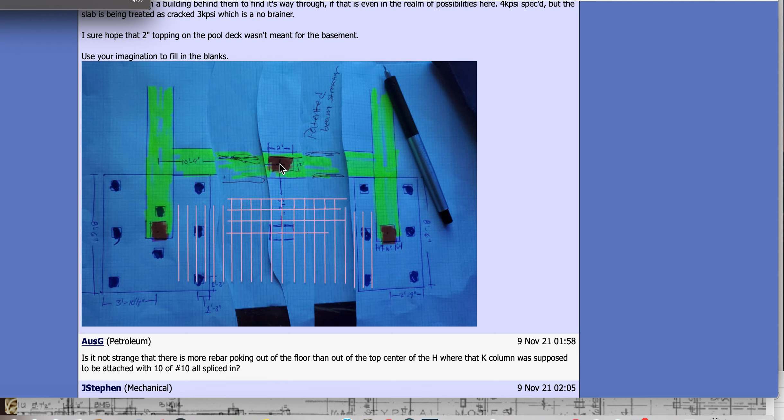Right here, it's out here. I'm like, you know what, you guys told me to do a fake video like I did my trash can, my vacuum bucket thing. Well I did a video some time back, but Jamie, I don't know where Jamie is anymore, busted me on it like right then. As soon as I tried to do my fake vacuum bucket deal, I said here's a column right here, it's in the floor there.

And Jamie, before, it was like instant as the video was playing, because remember we look at him in replay, Jamie wrote in the feed, there's no column right there, there's no column in the driveway right there. And I was like, oh man, busted.

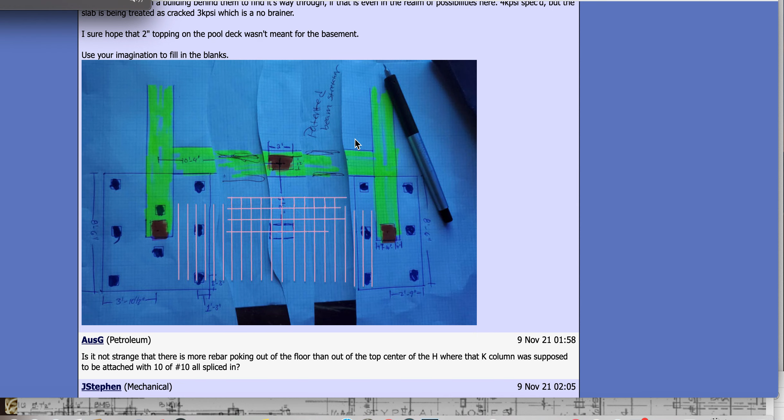Jamie didn't know that I was trying to do one of my fake videos and bait somebody in on it. And apparently Ostroff has found my fake video and is now posting it as 'look what I found, look what I found, look guys, it's a fake video.' Jamie busted me on it immediately. Everyone else should have busted me on it.

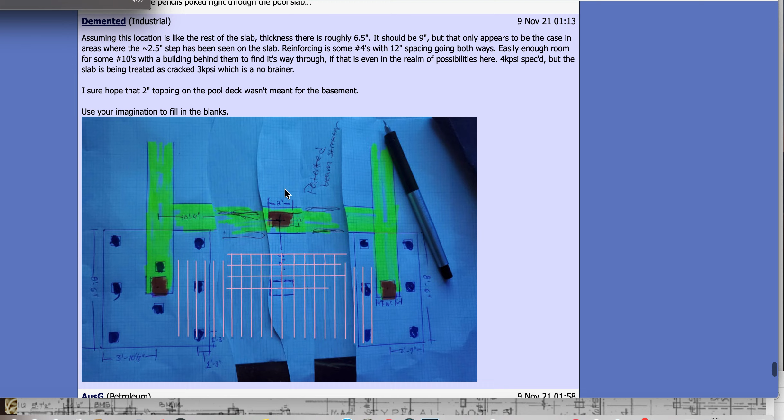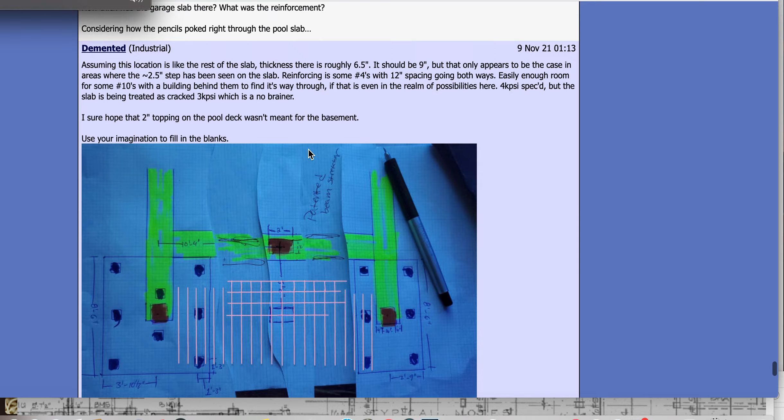Let's see what they say over here as of November 9th. It's a K column, but let's see what they say here. Let's go backwards, I kind of like reading backwards sometimes. I have not read all of this, so let's see. I'm not saying this is the next... okay, I got to go up more then. Obviously that's not going to work doing that. Whoa, double picture? Double picture, okay, that's confusing, let's just scroll up.

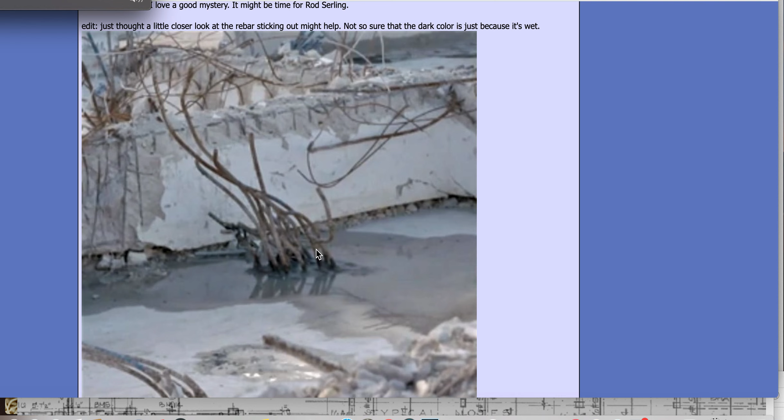Because he said it's over here chatting, and the engineer got over and said they're over here chatting. So right here is the quote mystery column, if you will. This is where Jamie busted me when I tried to discuss it.

Do I have your permission to use the phrase, you're doing pretty darn good compared to where I was? I was actually ready to say you found the column. I love a good mystery. It might, hold on, I got a cough.

Okay, here's the computer guy. This guy Charlie over here, he keeps thinking that I'm hiding my data. I'm not, there's a bunch of stirrups there.

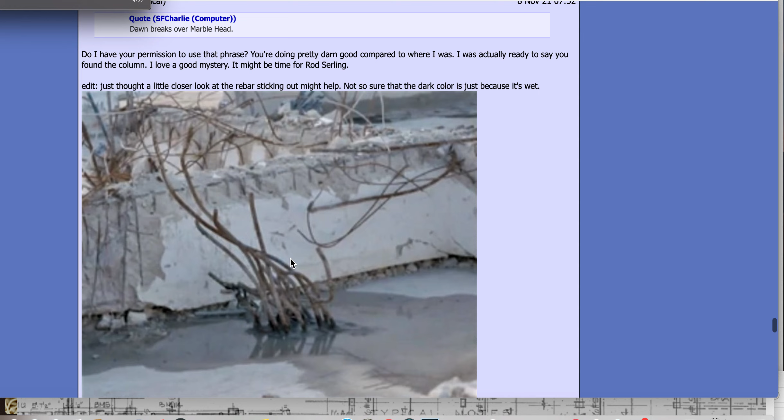This is implying that this column underneath here is what they're saying, it would be in the driveway. That's so funny, like I said, Jamie busted me like that. Look at the overlap, guys, the overlaps are nothing like the overlaps coming out of the floor anywhere else. There is no new concrete cut floor to put a pier down here, pilings etc. to hold the load of the structure. There is no cracked, deflected beam right here that would show why they'd even need it. So that's their belief, I understand.

What did Jeff say? Another interesting tidbit of information, I just brought up poring through the building permits. Several of the condo units in the 11 stack had the ACs replaced this year. We went over that stupid stuff forever.

I think a lot of you are misreading the plans, especially if you use the drawings Charlie uses. The line that you think is the bottom of the ramp on the drawing is not the bottom of the ramp. The drawings show the ramp in abbreviated mode, meaning it is not showing you the ramp continuing to the end. The bottom of the ramp really extends down to be on the north side of the H-beam. That ramp stops right where the ramp stops.

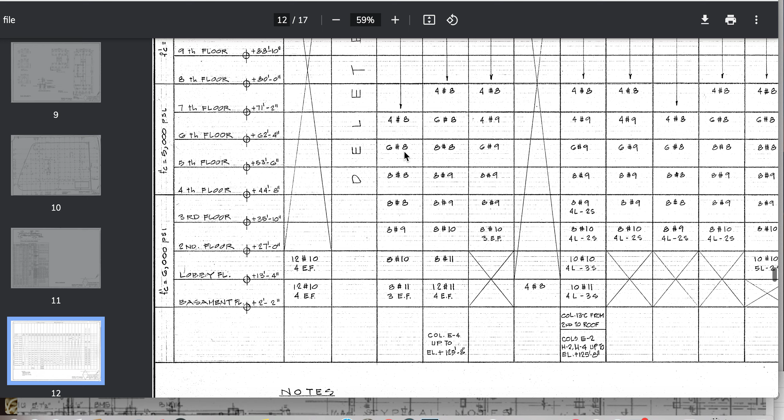Let's see if I do this right. All right, I don't want to give that away yet, I'm going to get to that. I already talked to the engineer, said I would do a quick 20-minute video, so I got to give him a video reply because we're writing back and forth. And I'm like, you know what, this is too much, let me just do a quick reply for you.

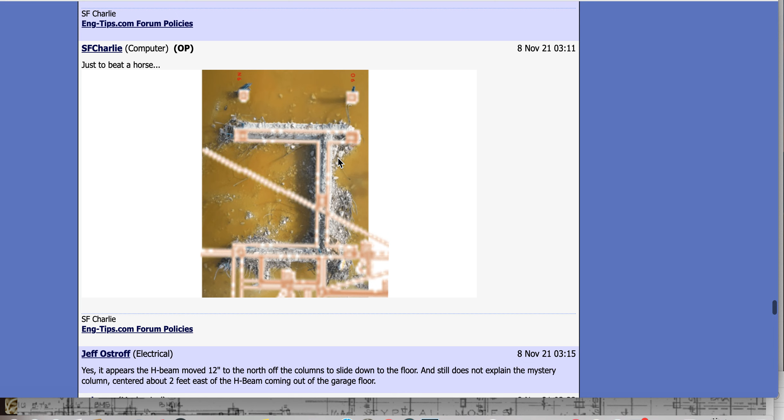Wow, he's talking to Charlie. Charlie's a, I don't care if he's talking to Charlie. Charlie's a computer guy, it doesn't mean anything.

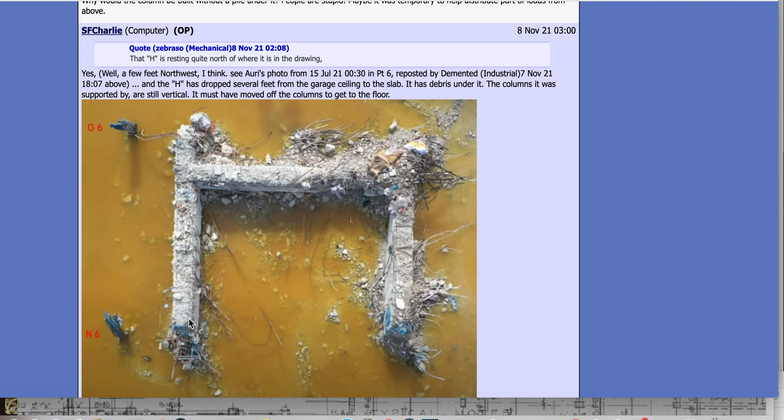Okay, so do you notice this plane? Does that look deviated to you, or does that look like a straight line? Deviation or straight line? Anyway, it's up to you to figure it out. This is slightly still higher. It's deviated. This is in tomorrow's video at noon, I don't really want to go over this now on that.

Newcomb says, why would you build a column without a pile under it? People are stupid. Maybe it was temporary to help distribute parts of the loads from above. Yeah, yeah. This is a good sound statement there. This is stupid to even consider that.

Jeff, where someone makes the claim that this column is falling 8 feet and impaling into the garage floor, you forgot that there is zero damage to the floor there. Zero damage is a big word.

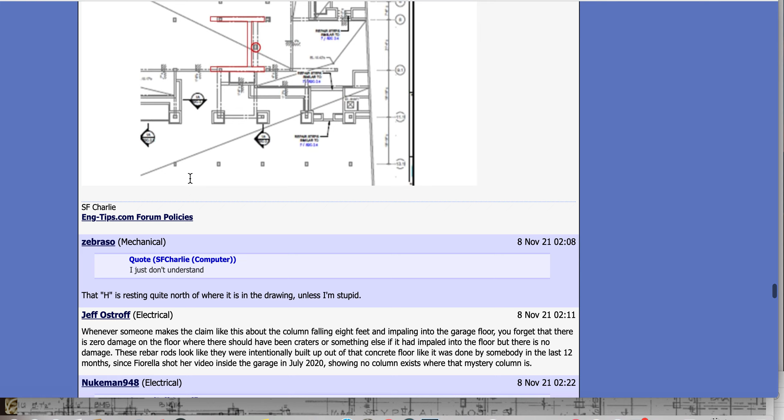Why am I doing this video? Really? All right, what the hell is this?

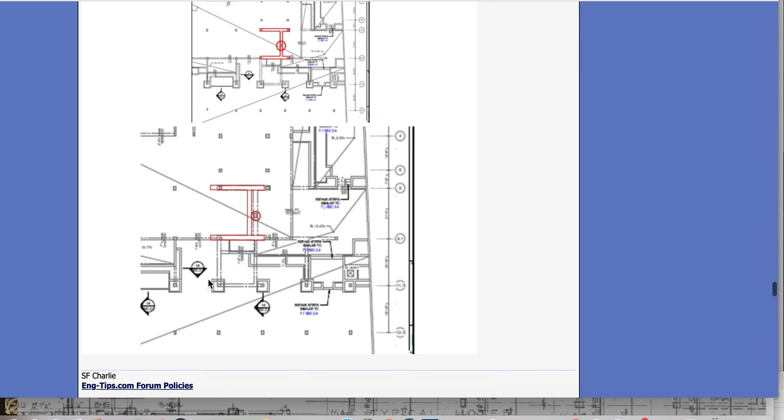Charlie writes on the drawing here, says, I must be stupid, but I just don't understand what the mystery is. Okay, Charlie says that. What is this, though, Charlie? Is he nailing it? Oh, no. The drawing, is it? I can't read it, it looks like he put more. Oh, these are the rooms above. What is this? Okay, not sure what Charlie's getting off on that one.

Newcomb: not to mention, no engineer anywhere in the world would put a column in the middle of a driveway only 4.5 feet from a perfectly good K column and transfer beams. Now, see, he said the K column, beams, but supporting nothing and only supporting a slab with no pilings. You know what, that's good enough. Newcomb is nailing it there. Who's he responding to? Reverse bias.

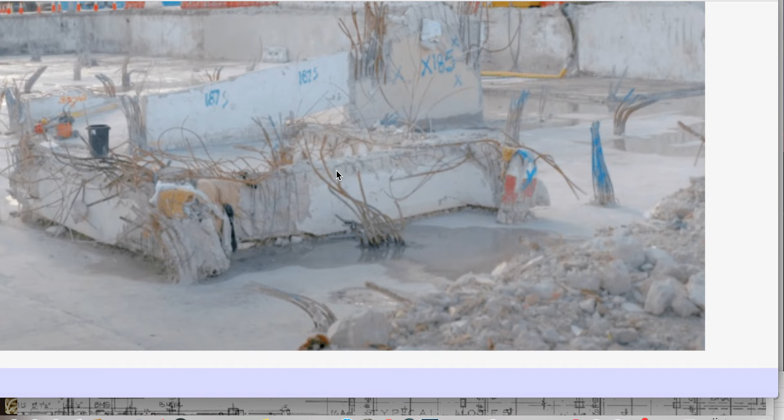Oh, here's a good picture. This is what the stub outs look like from columns. See how they come out of the ground stubbed out there? That's about the stub out height of all of them.

This one is way down here. These are way down here. This one's even taller, way up there.

So no matter what it may present as or look like, there were still parking on the other side of this. This is not some temporary column that they all of a sudden magically got the skill set to build an old rebar reinforced column within what? She filmed that two years ago and did that.

Now people are talking about it can't impale or whatever into this concrete. I have a video where I was trying to show you guys how to crack concrete with a sledgehammer, and I didn't publish it yet. I have so much video content I make for you guys. I punched through the concrete with a sledgehammer, and I was like, oh. So then at that point I said, well, that's what punching looks like. And it made a perfect punch through with the hammer.

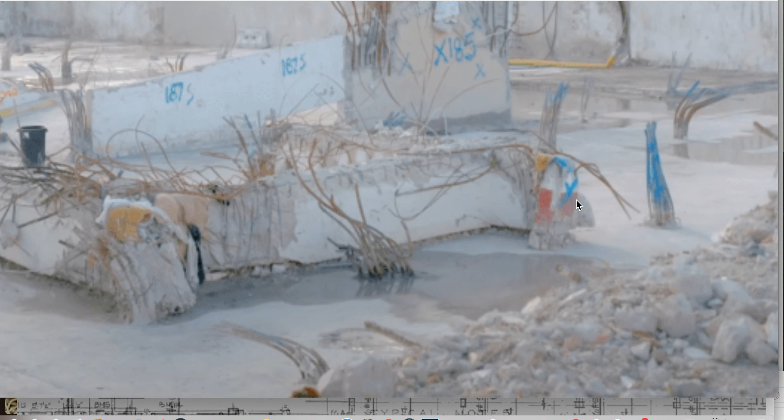And so this building driving down, it's odd. This one's the odd one where the head is missing. The forming of this is very interesting. This had a little more of a tail on it, I think, if I recall.

So this is this guy. See the tail, back end of it? So this tail seems like it just did a little shift, it did some shifting, and it drove down. It's where it is now, on the ground. Do you notice anything underneath of it? Any materials underneath of it?

Now this made it to the ground magically by itself. I showed it under the dog cam videos, which I'll talk about tomorrow at noon. The dog cam video shows this decking still to be in place around here, but it seems like they routed it out, if you will. They removed this decking that was on here, the slab, and they left this. Remember, they went at this like a bull in a china factory. So we don't know what really is going on here.

This is where I tried to get Jamie on, and Jamie stood his ground, said there's no column there. I was like, damn, Jamie got me.

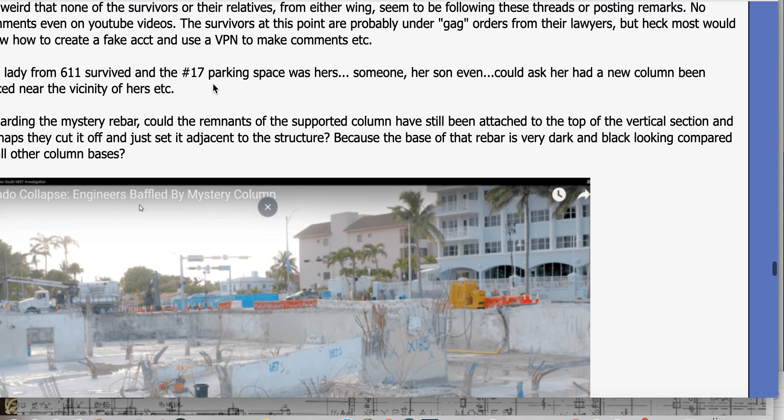Oh, engineers baffled by mystery column. This must be the one he's talking about, that the engineer told me about, that Ostroff wrote, that Ostroff did a video on. I did not look at it. No, I don't need to look at it. I set that up a long time ago. Jamie shut that down, and I hope to find it. Hopefully I've just said unblock all chats, so hopefully I can see it all in the chats.

Now let's jump right into the drawings. Let's slide back down to K. I'm going to do this kind of reverse and then reveal it, do the reveal that way. So let's slide down to columns.

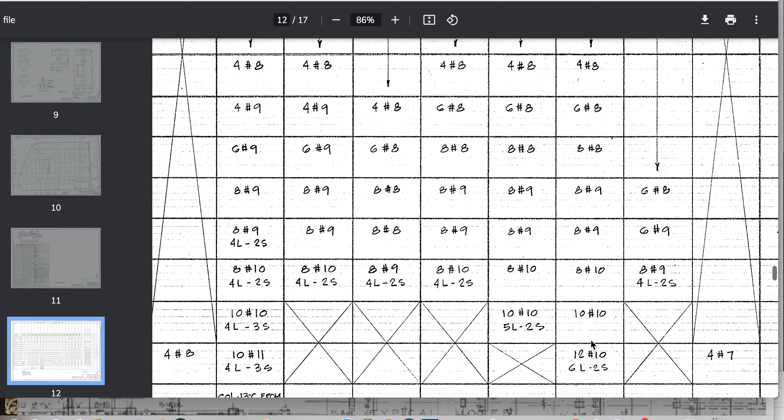Oh, so he's right, it was supposed to be a column on the floor there. Right on K, see the column right there? Right there, that's right on K. Look at that, he's right. Oh, that's L. Oh, wait a minute.

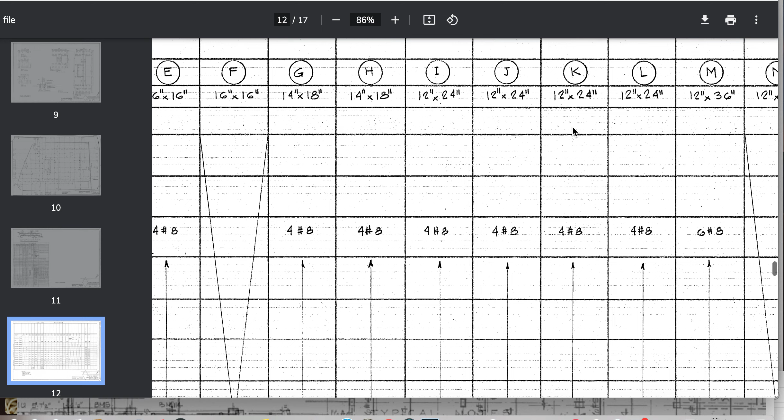Oh, here's K. So I slide down. And X there, slide over. X, basement, nothing. Slide over. It says lobby, lobby floor next. Slide over. Oh, isn't that amazing? Ten number 10s, all the way up to, oh it keeps going, all the way up to the roof line, up to the 12th floor. Isn't that amazing?

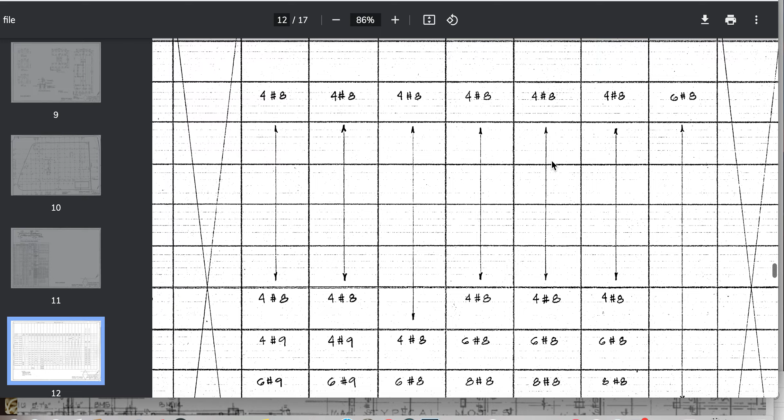So it appears there is a K column, and it appears the K column does not have anything underneath of it. Does not. Oh wait a minute, where's K? Where's K? Well hold on, hold on, where's K? Where's K? Where's K? Oh, where is K?

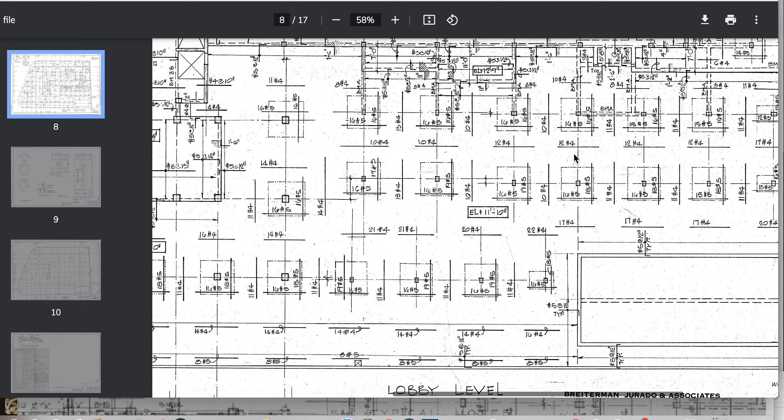Okay, so you guys got to stop watching that guy over there. Let him play around with selling his tools and lying about stickers on cars.

You remember? Here's K, there's your friggin' K column, all right? There it is, K column. There's an H, there's your H right here. Doom, doom, doom, doom, there's the H.

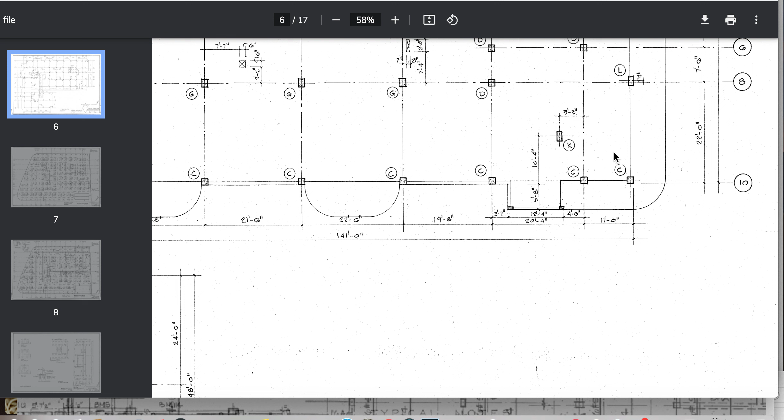I did an overlay video on this back in August. Really? Oh, this is part of content for tomorrow, I mean, yeah, tomorrow's video.

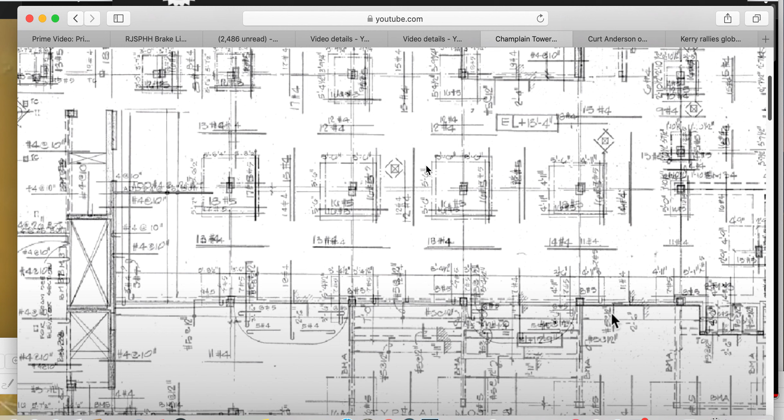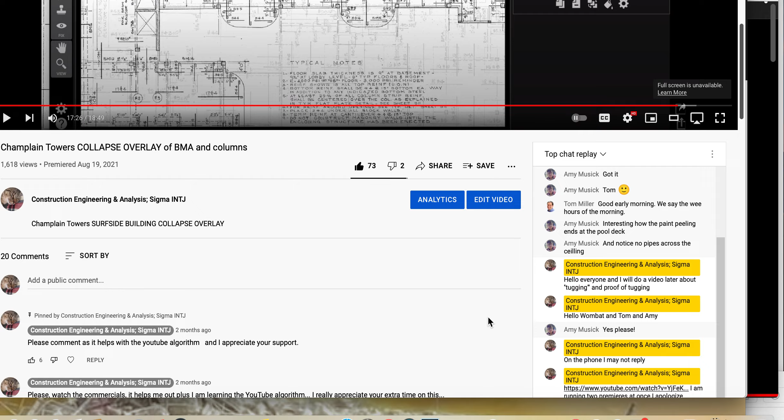Oh, this is my video. August 19th, I did an overlay, and I show that the overlay is here. I show the overlay is there. I was trying to find the one with Jamie, or I wonder if I even deleted Jamie's comment so it could still stay as a troll comment.

Jamie, I hope you're here, man, and you remember that you busted me on it instantly. I hope you're still around, and you can come out and say on this video, yeah, I said that. I remember you did that. And I remember I said no, and I said, well, Jamie, it's present, it's there. I was having a little fun, sort of like my video I set everybody up on, because you guys told me I should use some fake videos, set people up. This was one of the best ones I thought to set them up with the data of that column in the ground there. That would be so awesome.

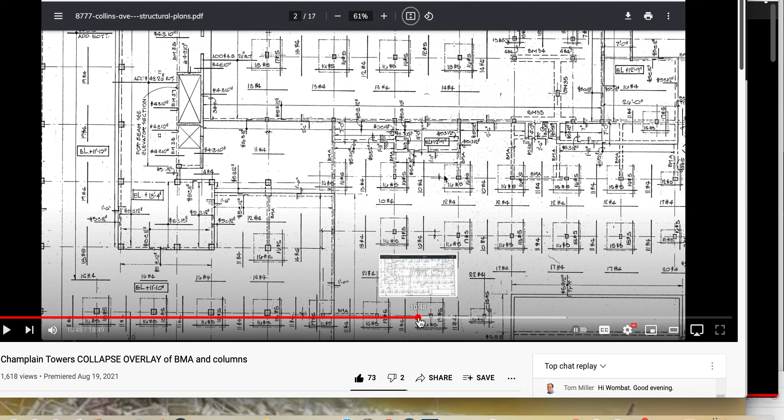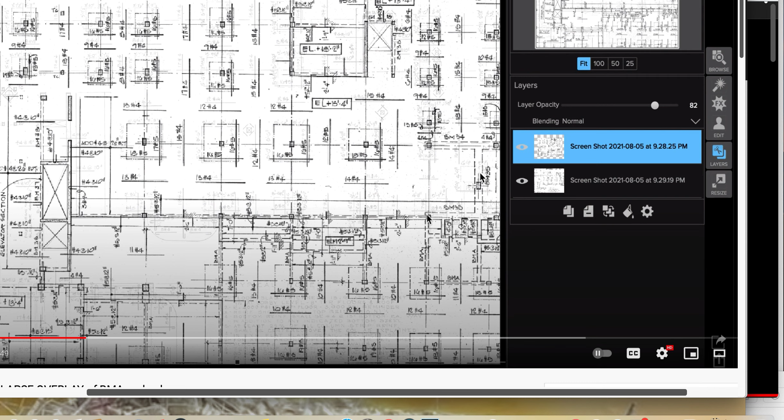Anyway, so right here is the overlay going to happen here. I think I'd show it. I overlap it from here. So right here is the beam, 35, and then as it comes in, failure happens here, which we still get it happening here. Now, I can tug on this one. Okay, hold on. I'm fast forwarding. We get our stockpile materials coming this direction. Let's go to this. Watch it fade in. Okay. Oh, that was brilliant. All right.

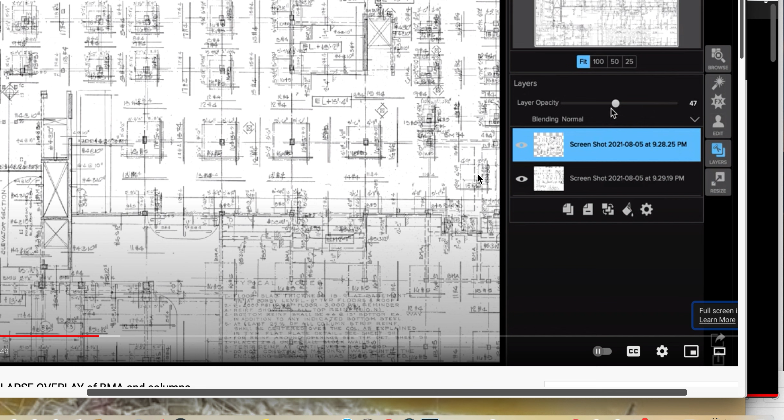So when it fades in, that's the critical shear area that they used, and that would be very critical information to look for, the reinforcement that they use for that area. Even though it's sitting on top of this transfer beam, they still added all this extra reinforcement around it. Now that is a weird duck, because they're now making that load share it on this and also out here.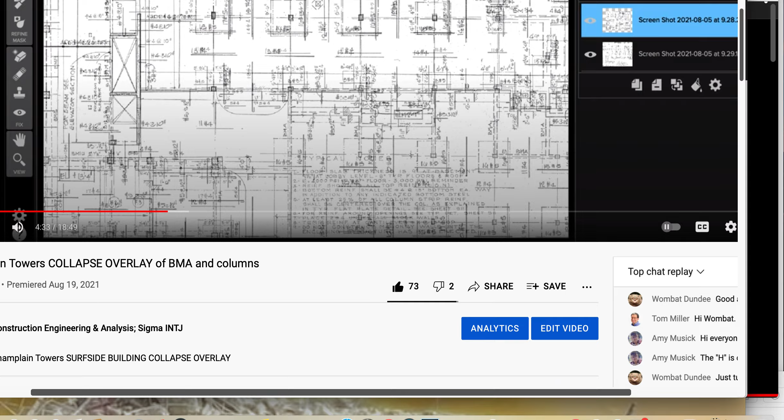But that's not the very beginning collapse, so we don't have to cry over that. You know, no smoking gun there. It's just odd that they did that. But yet over here, they didn't use any reinforcement. If you want to go after something that's really weird, it's E, I, and J. I want to get to that in another video. That's my little hint video right now on that. But if you want to go after something that's weird, it would be these guys. These guys.

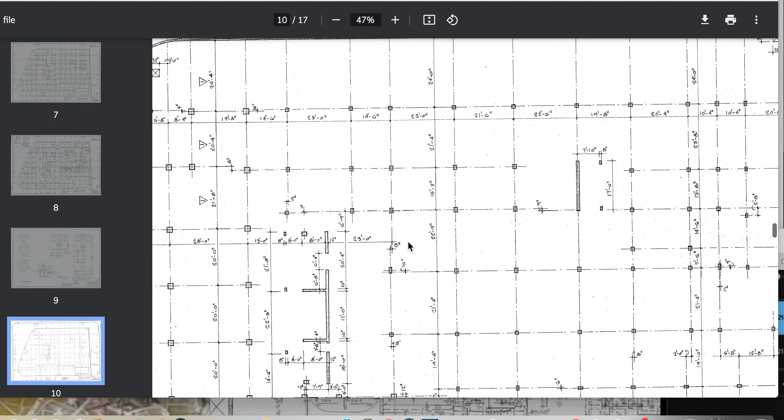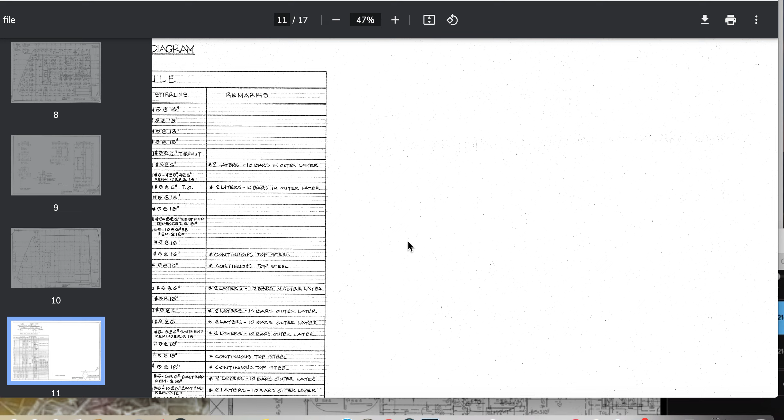Okay, that's 11'10". That's interesting. Hold on. There's one without. Wow, that was weird. Oh, I can't show you my drawing. Let me look at my drawing. The drawings behind it, the full-scale drawings. Yeah. Okay, I got it. All right, it was back there. I just looked right at it and didn't look at it.

No punch shear protection around here, around where these columns connect. It's just connection to the transfer slab. And our transfer beam, I like to think of it as, because it's a beam acting right here. This right here, the detail, that slab drops. It's just connection to the side of it, with no bar all the way across, so it's not fully developed. Just hooked into it rather, and it's hooked in at 12 inches.

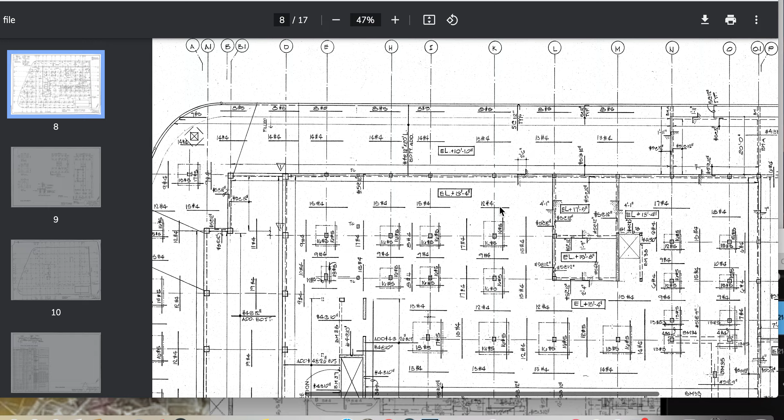And for fairness, we get to see, well, what else is hooked in at 12 inches? You look at the other side of the wall here. This is also hooked in at 12 inches on this wall over here, but it is backed up by the bulkhead, helping it secure and interlocking like a composite material decking, making ultimate great columns because of the way it's detailed, and reinforced down to foundation. This is hanging.

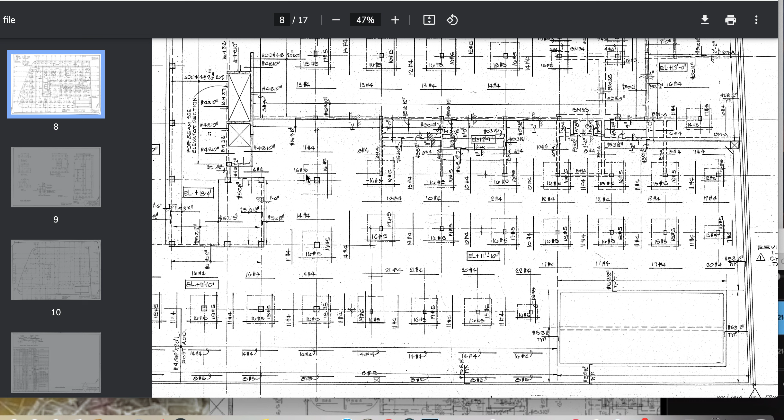Boy, oh boy. This is coming out to be so weird because I have drawings. I'm still looking for it. There was no punch shear protection. Clearly there is. 11 foot 10. Okay. That's 11'10", and that's 11'10". There. Let me look at my drawings behind me. That's what the difference is. Hold on, looking at these drawings behind me. Oh, I can pause it. Hold on.

Okay, so FYI, when this was at 10 foot 10 inches, it's 11'10" now. This had no, looking at the drawings behind me, this had no punch protection on it. And I made a big stink about that in the video. But clearly, updating that, when they went to 11 foot 10, they did add punch protection. I think I talked about that with adding the extra piece of rebar also.

But I'm not sure if I stated that they then added the punch protection here once they removed this beam that goes all the way across in this plane here. It goes all the way across and then transfer beam here. So when they went to 11'10", they didn't just remove it. So this just tells you about intent of the architect and engineer. They didn't just remove it. They added this one. I'm looking at the drawings. This goes across, across there, right? So they added punch protection here.

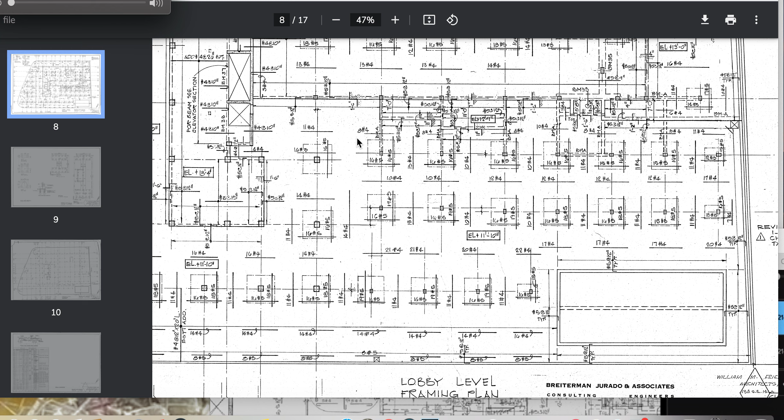5 12s, right? And then behind that, 11 fours. Not 11 fours and 14 fours. No, they left these the same. I thought they did 1 more back here though. This is the 5 12s, 4 10s, 8 fours going that way. Looking at the old drawing, 4 10s coming out of here. No. So this is added, this is added, and that is added.

Again, on the second floor, this transfer beam takes the load above. Now let's think about where this is going. This is getting a little bit like mass hysteria, hallucinations, where you all believe in it, you all see the same ghost. All right, so be careful seeing the same ghost. They're starting to see the same ghost.

So this beam was designed to take on the load. It's clearly designed there. If it was always intended to go straight down, then they wouldn't need the transfer beam part. This would not be needed. There is no other beam here. The purpose of this beam across here is to support this beam, which is supported across this column and this column. And not only that, the purpose is to support this out here.

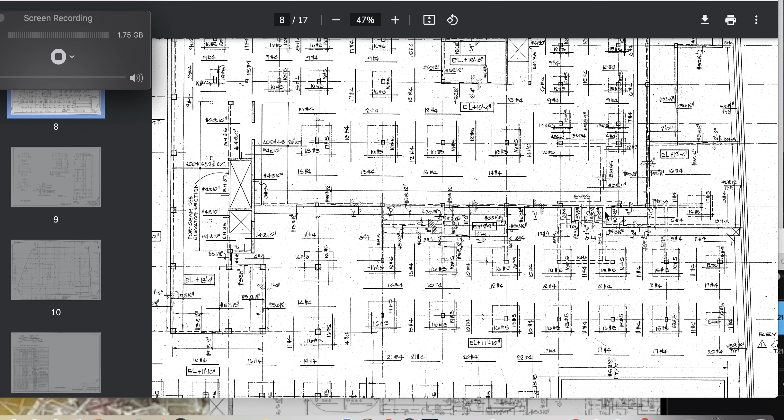I'm trying to zoom in more for you guys. Okay, so it looks like I can. So the purpose of this beam 33, this one here, is to also support that bump out, that 4 foot 0 inch bump out. Whoa. Well, isn't that a change of heart? Whoa, did I not see that?

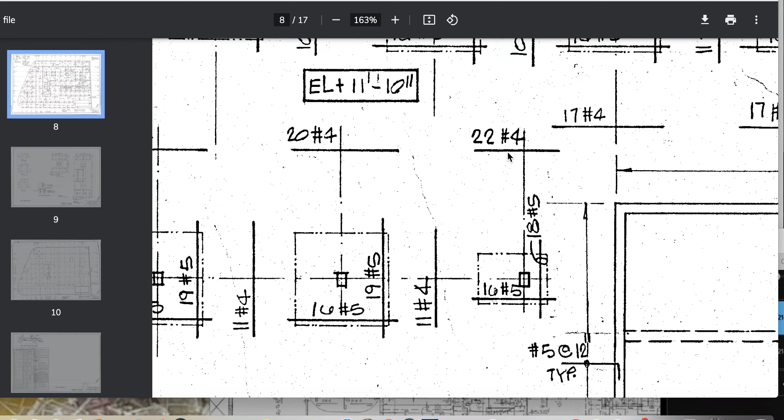This is the 11 foot 10. Oh, update. Where's my 4 foot? Oh, I'm going to do another video. Let me confirm something. Yes. They bumped this out from 4 foot to 5 foot to 5 foot 8. They bumped this out. The other plans have it at 4.

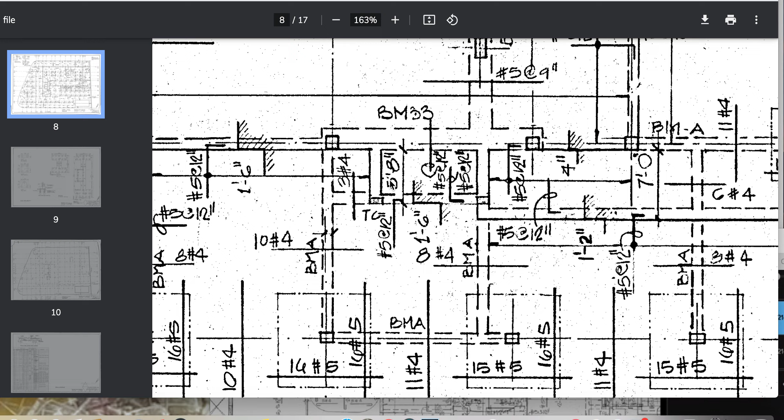I've got to pause the video and show it to you. This is worth an extra minute. Hold on, guys, I'm going to pause it and find it. It's going to take me a minute. I've got to open up plans now.

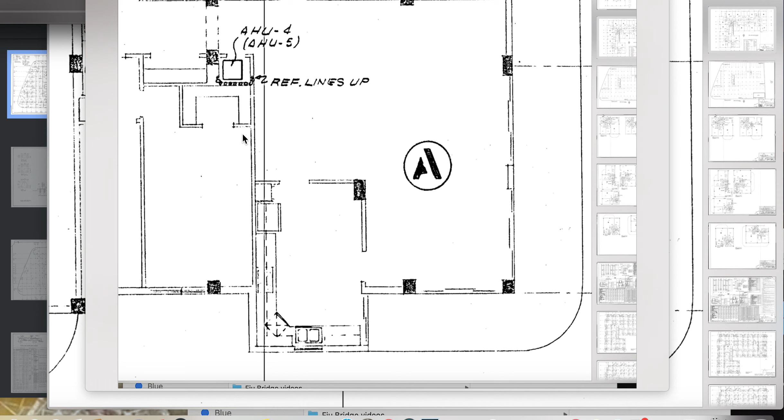So this is apartment A, this is the H-beam, if you will. Let's give you a quick look at that. So this will be your H-beam, and let's go with the big one. Oops, forgot it won't let me draw when I'm too close. Let's move it out of the way then.

Okay, so there's the H-beam right there. And then this tags off further out to another column. I'm sorry, this goes out and then this comes across to pick it up, and then this goes this way if I recall right. And there would be a column that picks it up this way, and I believe something like that. Something like that that picks it up.

So the H gets hit that way. But this is the load bearing section. And this is how they decided to handle it, because they wanted nothing in the way of the cars to get in there and park. So at that point, they had to make this H-beam up, if you will, to take the load of this column going up to the roof line. All right, so let's move on from there.

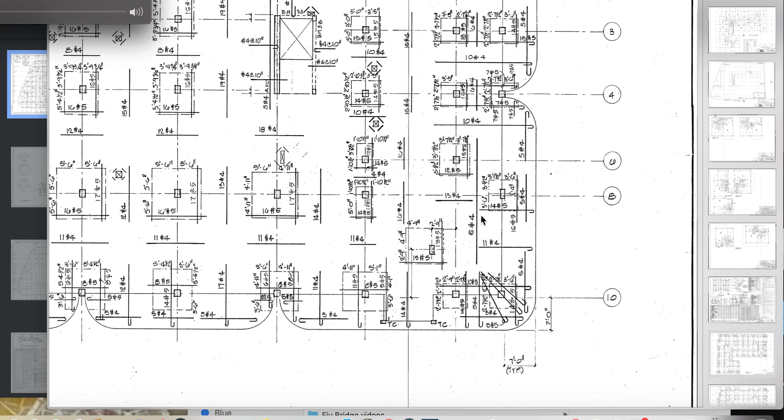This is the penthouse setup, and there would be your H-beam going across there, across here, and it would be on the underside of it, and this would be the last column for the H for the penthouse. Yeah, this would be the last one, and it's at the roof line at that point, with probably a critical shear area to help transfer the loads. Or they may have just eliminated it altogether at the roof line.

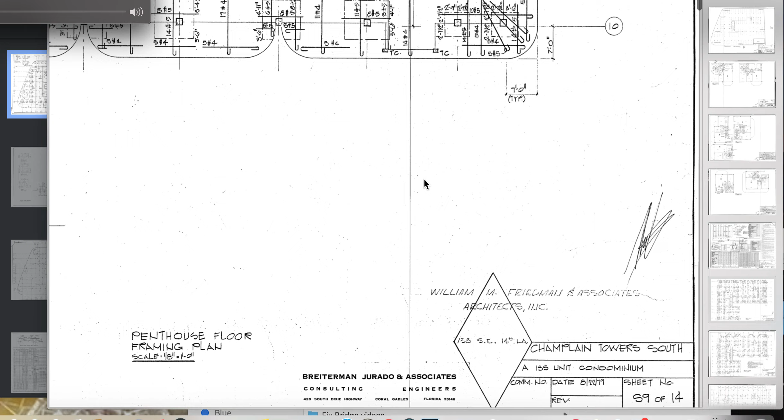And this says we're at the second floor framing. So second floor framing up, which is interesting, they have a critical shear area here on this one, and yet the 15 #5s and 13 #5s. So apparently all the way up to the penthouse, 15 and 13 #5s. I don't know why it's there on the first floor when it would be sitting on top of the beam. Only thing I could think of, what if it was offset of the beam, but that doesn't make sense because they could have remedied that.

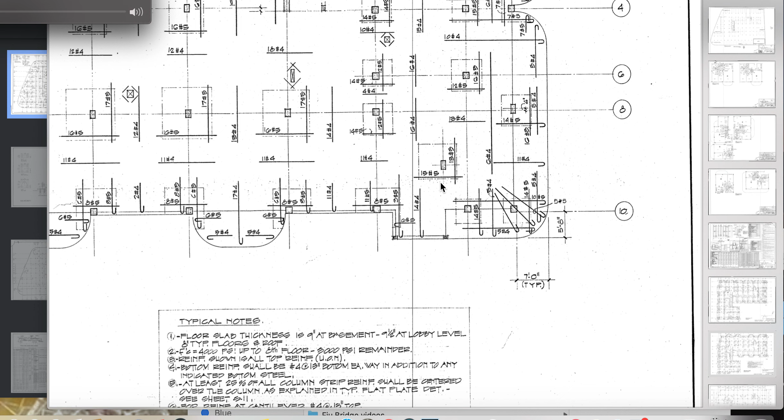But nevertheless, this is the wild part here, where this is going to get very interesting, because this says 5 foot 8. Son of a gun, what year is this? 79. And yet I have 4 feet. 5 foot 8, outside wall to outside wall. I'm looking at the drawings, guys, the paper, hard copy drawings. I have 4 foot. So when we have the 10, we have this. See the 5 foot 8? Watch it vanish on me.

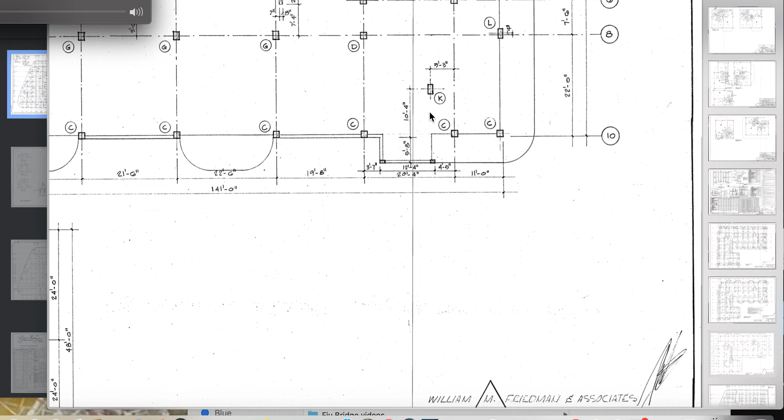What do we have for the width outside to outside here? 12 or 20. It's a kitchen in there, I believe. It's a kitchen bump out. I thought it was a porch. It's a doorway there from the kitchen, I believe, coming in here. So that center line, 12.4 is the center line. 20 foot 4, I can't quite make it out. Looks like 20 foot 4, let's call it, right here, outside to outside. And then 4.5 and 3.7, okay. And then there's your offset from your outside wall to this column. And that is very interesting.

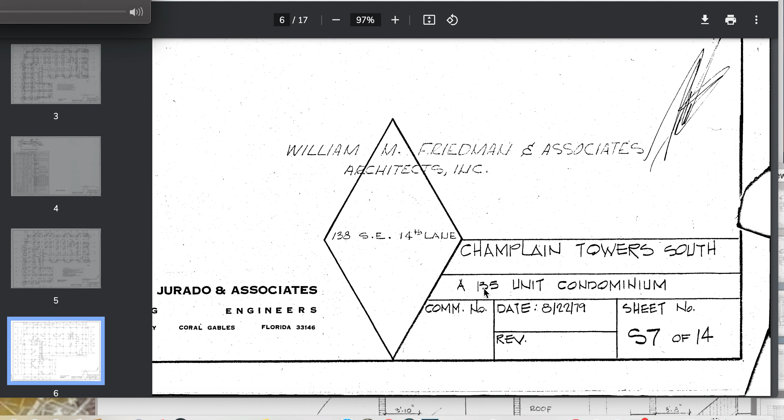5 foot 8 right there. 5'8", and so we know the measurements here. Bump out. Let me pause it and find that 4 foot one. Okay, it says 5 foot 8. We're looking at outside wall to outside wall, this face here is what I was driving at. So outside of the face to the outside of the face, 5 foot 8 inches. This does say Champlain Towers South, 82279, S7 of 14, 135 unit. Okay, page 6. Outside to outside. All right, and then 10 foot 4 to there. So that's page 6.

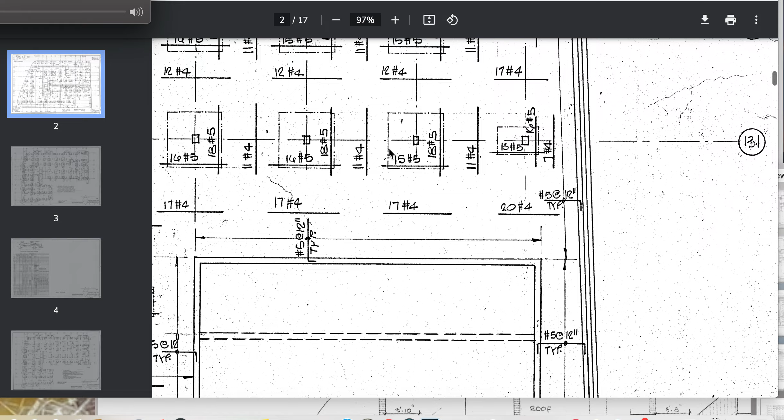Hitting on page 2. Page 2 is right here. Let's get you in the corner here. S5, 822, same date, 135 unit. Well, let's confirm 135 unit. So you go over here and look at the inside corner, and it should be different. Pool. There's the 1010 drawing. See 10 foot 10? 4 foot.

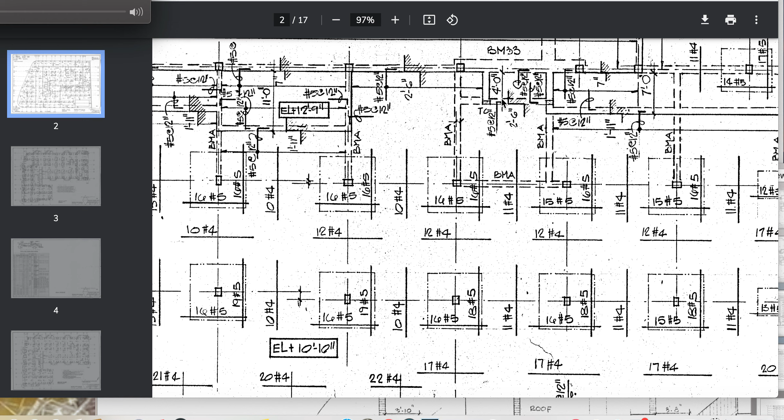So not only did they change the 2 foot 6, here's outside wall to outside wall, they actually made that larger. So not only that, they bumped this out 1 foot 5 inch, 5 foot 8, 1 foot 8 inches. They made this larger. So they got a lot of sneakery on their same documents. I mean, my gosh, they got some sneakery here. Here's 4 foot on page 2. And then you scroll down to page 6, and there's other changes that have been made. This is now 1 foot 5/8 inch bigger.

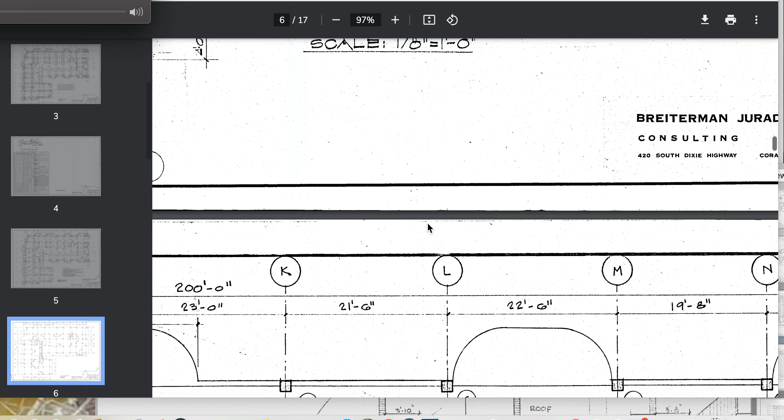So page 2 has the BMA on it right here. The BMA's in it, right? And page 2, also see where I said there's no punch shear protection there because they had this BMA going across. And then they added it down, they added it here. These two are here. Now we go to page 6 again. Page 6 is the critical page on Game Changer. You need look no further than page 6 to see where all the sneakery was done. Well, I guess you can look further, but where can we zoom out?

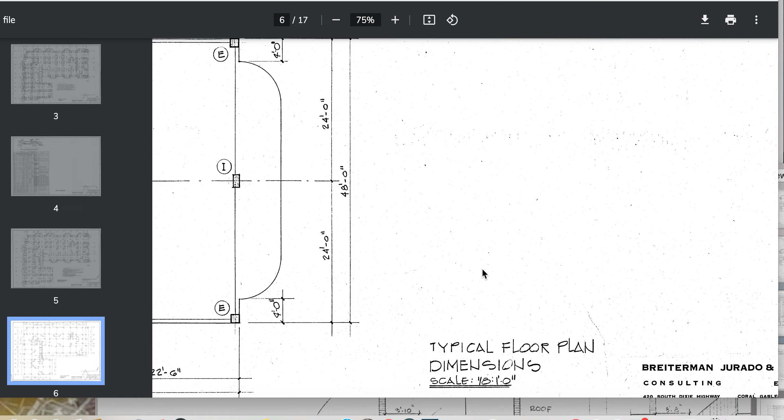Now it becomes 5 foot 8 right here. This seems to be the 10 foot 4 step off still. So it went outwards, 5 foot 8, and then, oh yeah, I need more drawings than this because of punch shear protection. And then now we get the 1110, 1110. Where are you, 1110? I thought it was 1110 to your left and 1110 to the right on this drawing. So, you guys see it before me? Let me know. 1110, 1110. Come on, sweetie. Well, right here is your punch shear protection added. Did I go too far in?

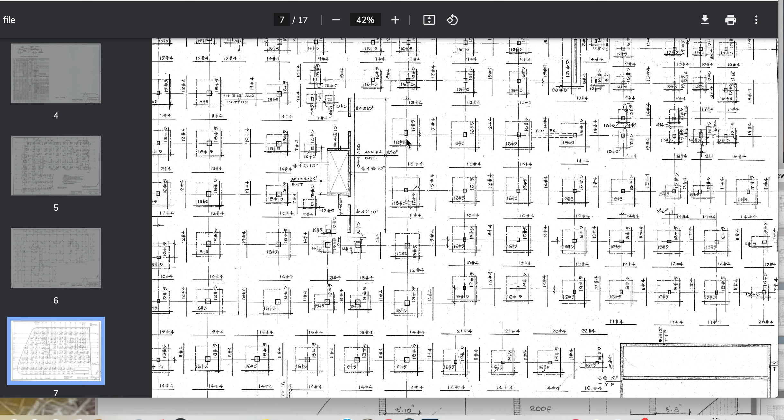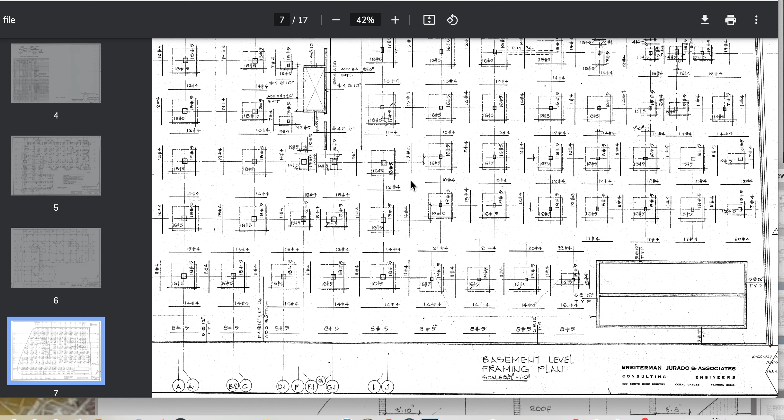Right here, and this one, correction, this one. There was 3, I thought. I recall there was 3, but I'll have to overlay that another time for you guys. I'm not going to go that crazy on it, but 1110.

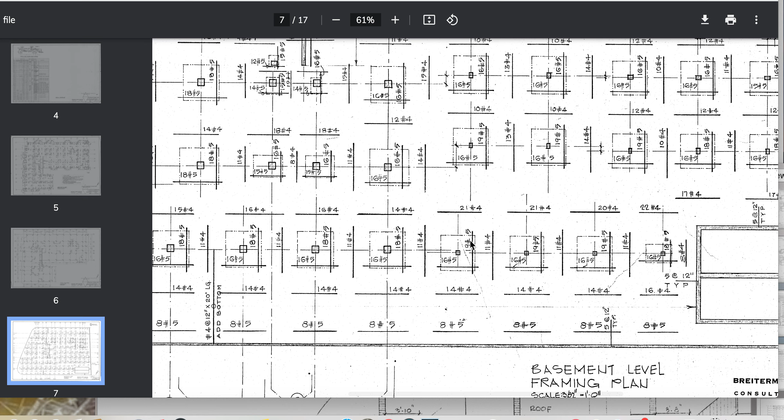So what's the trickery about this one? Where's my 1110? I'm kind of stuck on finding 1110 now. And I know you guys maybe see it and I don't. And basement floor plan. Therein lies the problem. 1110. This is the pool deck area. So a punching shear protection and 1110.

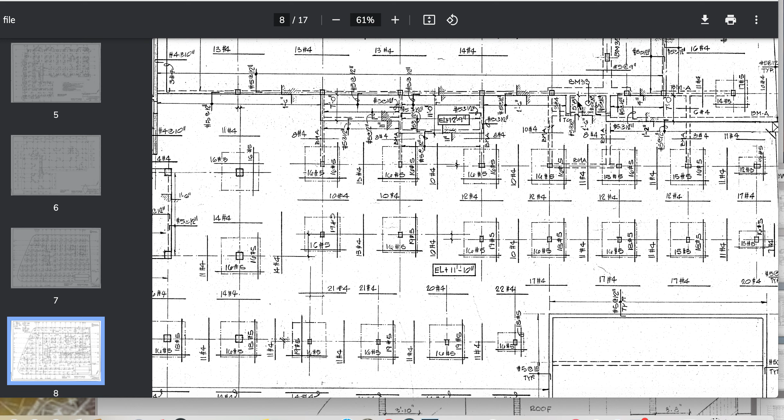So not only that, they then bounce it out to 5 foot 8 right here. 5 foot 8 inches. That's on page 8 rather. So page 8 and page 2. So here it is, 5 foot 8 inches. Did they do anything over here? I mean, it's farther over, but here's 5 foot 8. So they snuck an additional 1 foot 8 inches on the plans.

And yet it only says change of column type on the revisions. And yet it's more than that. It's dropping the BMA. It's adding the critical shear protection. It's added an additional 1 foot 8 inches of kitchen space here.

Okay. All right. I'm going to end this video with that. It got kind of wild there, didn't it? That's good. It came to that.

So this is in response to a couple of people writing me. I hate to say it, but remember Jeff, based on his video doing the con man commercial, saying that they don't post and reveal the true data on the sticker. Remember the sticker we looked at, the car video? He is that type of person. So you guys are asking me to go behind a person that's willing to deceive his viewers, because he publishes it.

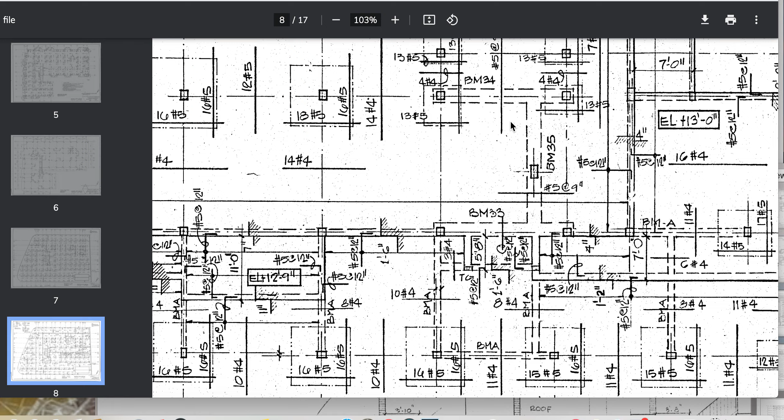Well, your comprehension of his bold letters is no good. It's your wording, Jeff. Come on. Your marketing strategy and the way you present is kind of terrible, man. It's not right to do. Unless you were paid to do this. And he titles it "New Car Dealer Scam, Fake Window Stickers." This is what he actually titled his video. I can't be paid enough to deceive people like this. Watch this.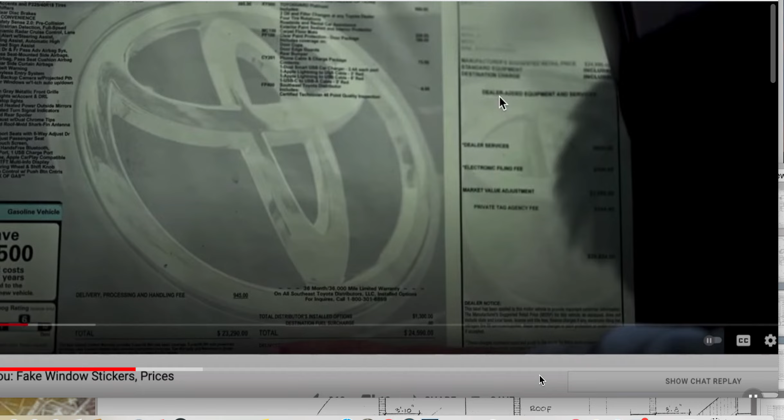This label has been applied to this motor vehicle to provide important customer information of manufacturer's suggested retail price for this vehicle as equipped. Does not include state and local taxes, license and title fees, finance charges, electronic filing, nitrogen filled tires, dealer service charges, or paint protection or undercoating if accepted. And it says these charges represent cost and profit to the dealer for items such as inspecting, cleaning, etc.

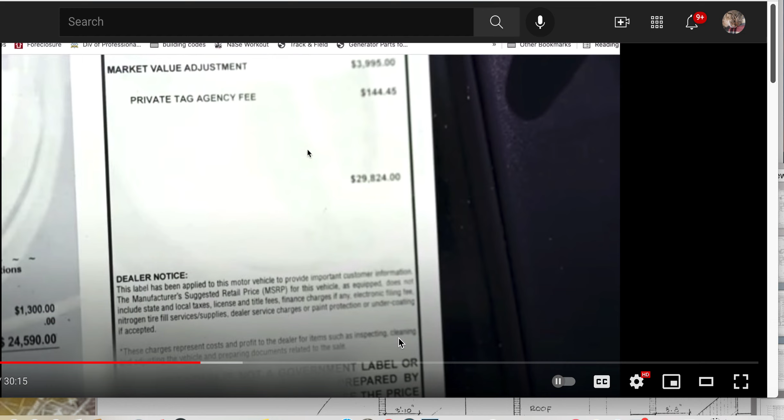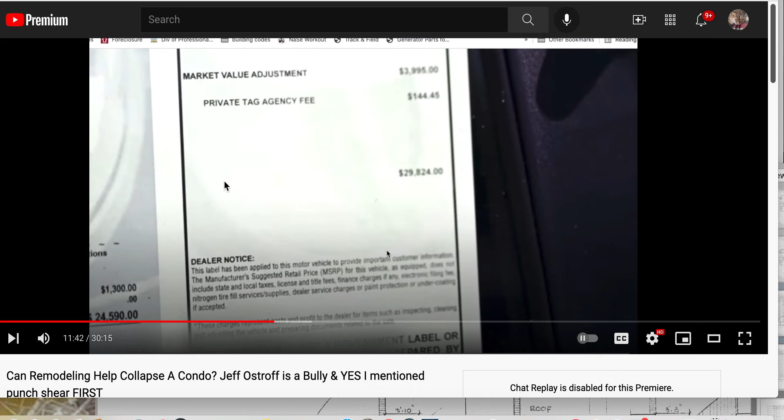Then it's going to get even bolder. These charges represent cost and profit to the dealer. I'm telling you what it is. Items such as inspecting, cleaning, and adjusting the vehicle and preparing documents related to the sale. So they're saying they got some fees related to that. Now, they are inflated, but it's disclosed. Fees, real quickly: dealer services, $695. Electronic filing fee, $400. Market value adjustment. So they're saying they're going to get $4,000.

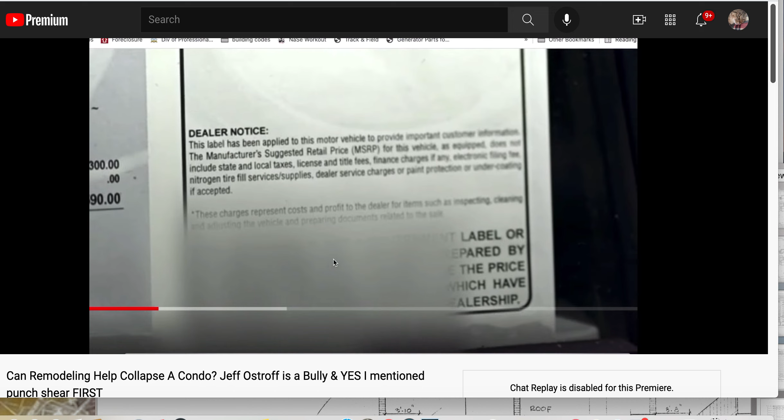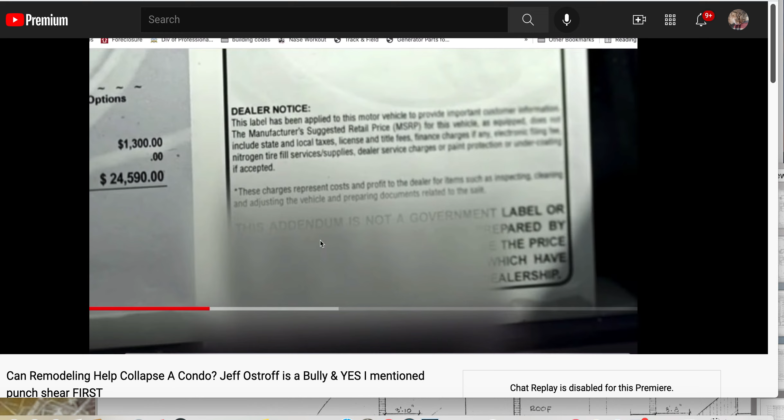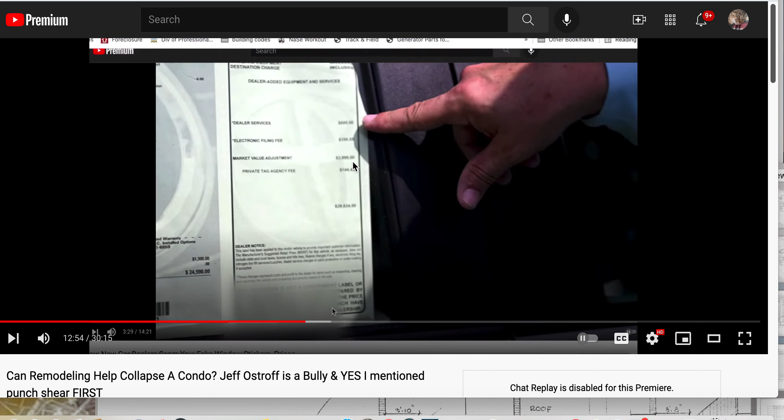I'm not going to go through the rest of this, but you see he presents a video trying to show how he's helping the honest man, but in reality, he's manipulating the data like my sinkhole data that he said. So he will lie and deceive. This guy did it, lie and deceive. So you guys keep going back to his videos. I know you guys watch me also, but you may watch him for entertainment, but he's got nothing to offer you. He manipulates, he'll lie, he'll put anything out there to just get people to, as the guy says over here, come on back, folks, and buy my forklift or whatever it is.

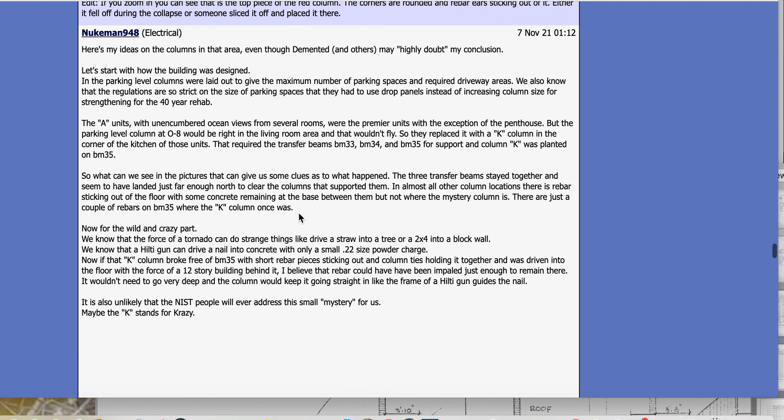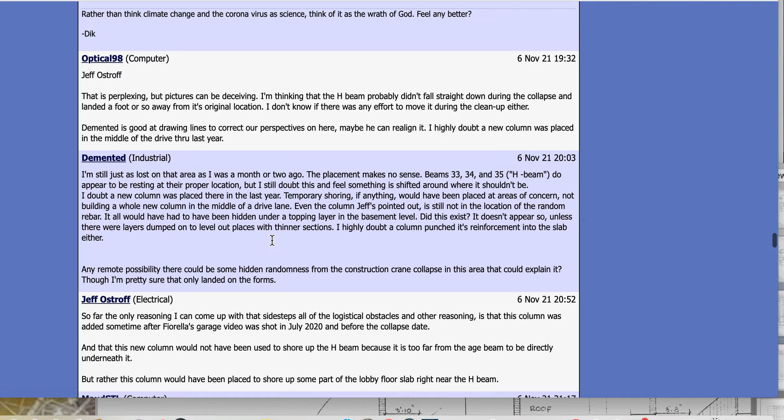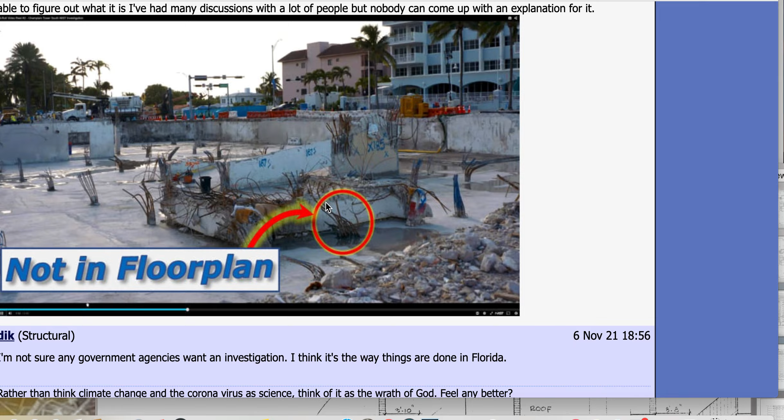The one guy makes fun of him over here a lot. One of these engineers, I think he's quite humorous. Quite humorous. I saw it. Post deleted. The person wanted to delete it, or somebody deleted it. Right there. Not in floor plan. Yeah, and it's not in floor. Okay, Jamie busted me on that a long time ago. Idiot. Not Jamie.

As he stated, do you think someone would put the column there? Don't be a friggin' idiot. This does not look like it's fractured or anything else. There's no reason to do it. They didn't block it. Her video is 2 years old. So what? You can't understand it. Go back to hawking your tools and lying about car stickers.

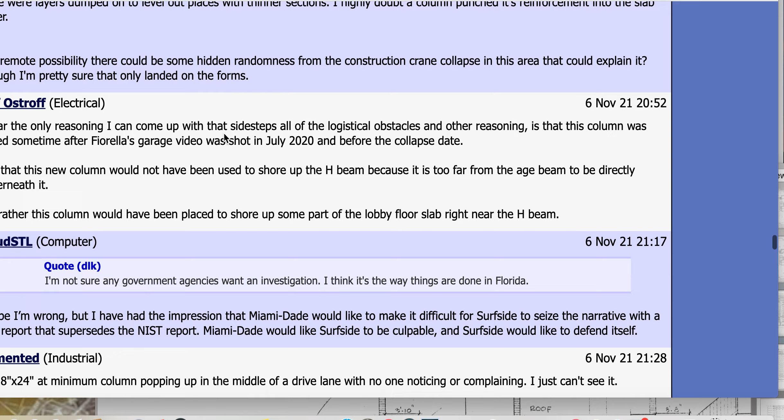I think it's Newcomb, the guy I like the most. Oh, he got rid of one of his signatures. Newcomb did. I like the signatures. Where is he? Darn it. He got rid of his signature. Yeah, I just want to be free to drive my forklift wherever I choose, this guy writes. He's making fun of him with his forklift stuff. All right. I don't care.

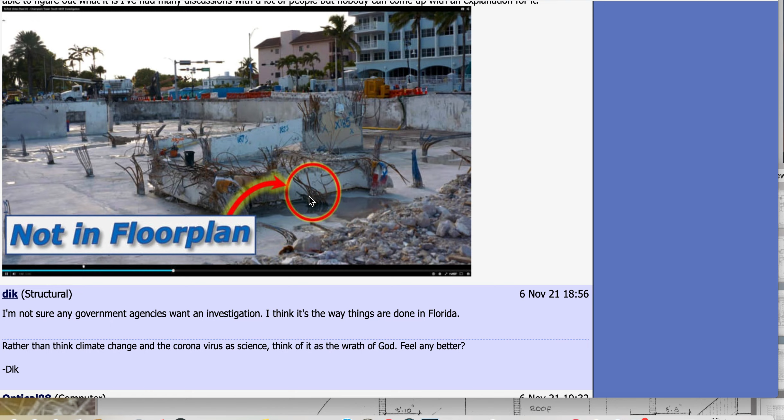It was not put there. This was not put there. There's no concrete around it. There's nothing. It's not a column that was installed on top of a pad. They didn't lose parking. They pulled plans, permits for everything, for painting here. So now you're telling me within the time she took that video to the time this building collapsed, they built a column there without a permit? That they went in there and built a column and nobody got upset that they couldn't park their cars back there anymore? That these parking spots were lost to the condo owners, both sides?

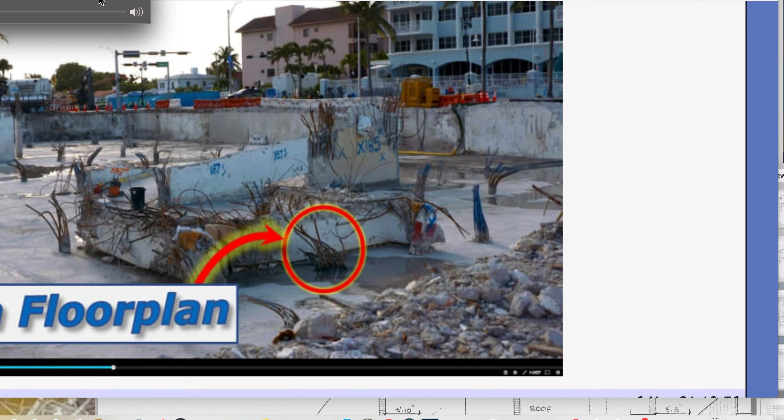This is just pure shit. I'm ending the video. I can't be triggered by this, guys. It takes a lot of energy. I don't want to talk about idiots like him. All right, goodbye.